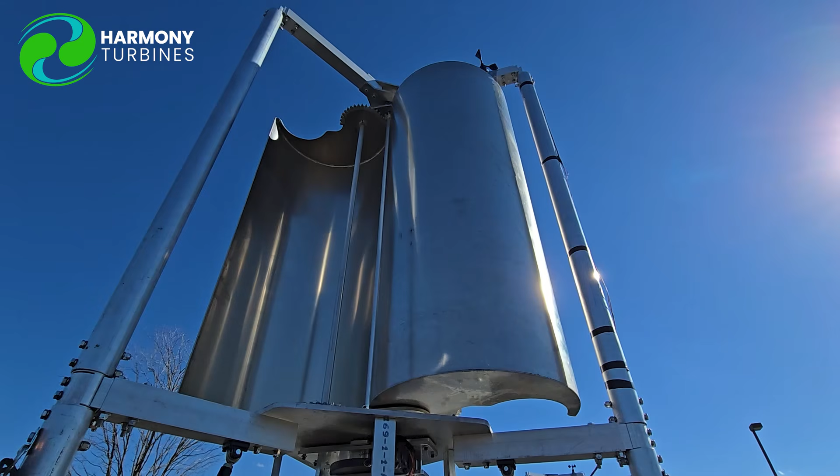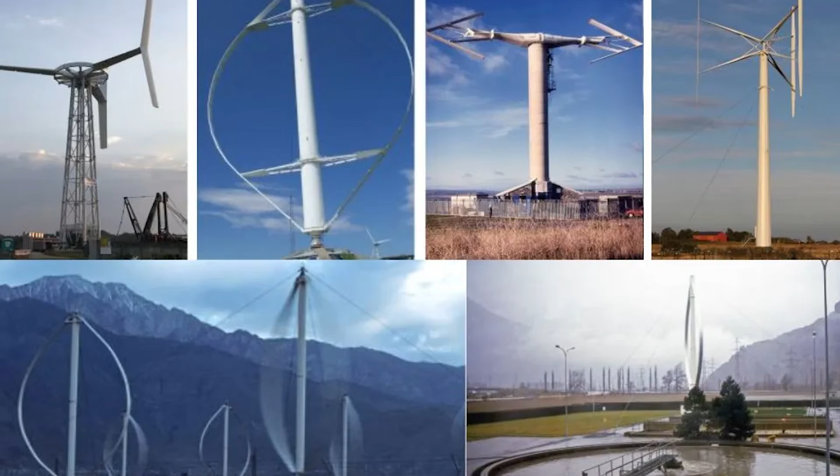So I know that people know what wind turbines are, but yours looks a little different. You mind giving us a little background on the design and what makes it different from your typical fan-looking thing? Wind turbines have been around for thousands of years. In fact, some of the first wind turbines ever created were vertical axis wind turbines. Our turbine is specifically a type called Savonius turbine, and that's a drag type vertical axis wind turbine. So without getting into a lot of the nitty-gritty, take a 55-gallon drum, cut it in half, and then separate the two sides offset from each other, and you have a Savonius design.

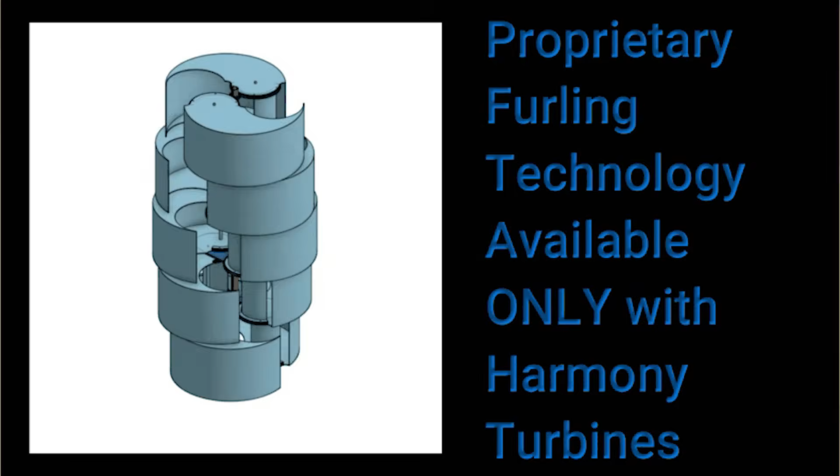Now, we have been playing for years with having a helix twist in ours, but the basic shape of our turbine is a Savonius turbine. And then on top of that, we have a patented technology which allows our turbine to close or furl in on itself to whatever degree it needs to control its RPMs.

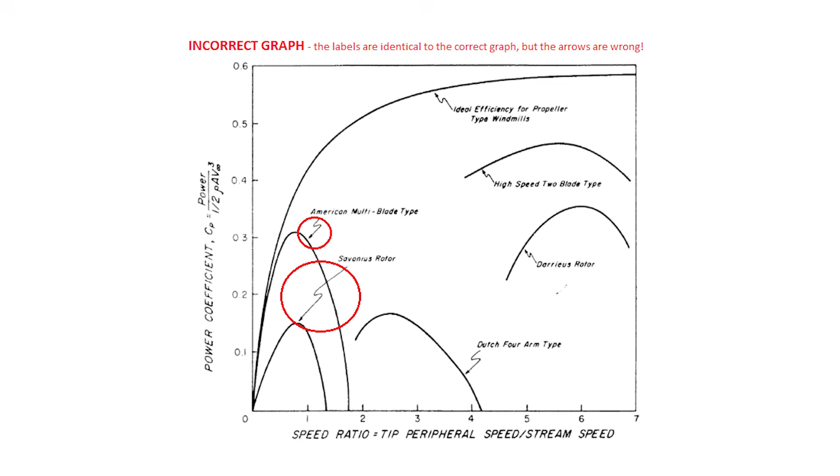Last time we talked, there was some weird quirk of history where many people stayed away from what you're doing because in the textbooks it said it was a dumb idea. It was very inefficient. Can you remind us about that again? Yeah, there was some literature that was published back then; printed books were about the only publication that came out for colleges and universities, high schools to teach them. They had basically listed a number of different turbines, the 3-blade propeller turbine, your Darrieus vertical axis wind turbine, Savonius turbine, the general American farmhouse windmill.

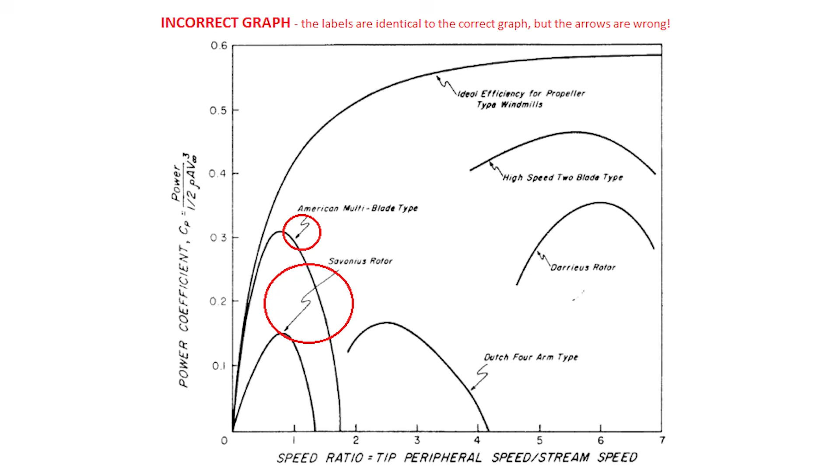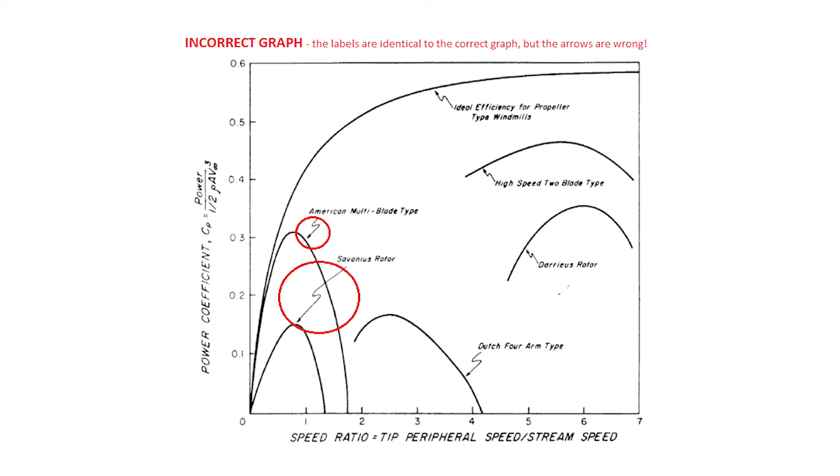And they misdrew the lines. The labels stayed in the same spot on the correct original document. But then this erroneous one came out that had the labels in the exact same spot, but the lines were misdrawn to the wrong thing. So the American windmill and the Savonius turbine got flip-flopped, and the performance of the American windmill was suddenly now being shown as the performance of a Savonius turbine, which was much lower than what Savonius turbines could produce. That then got replicated and published all over the place.

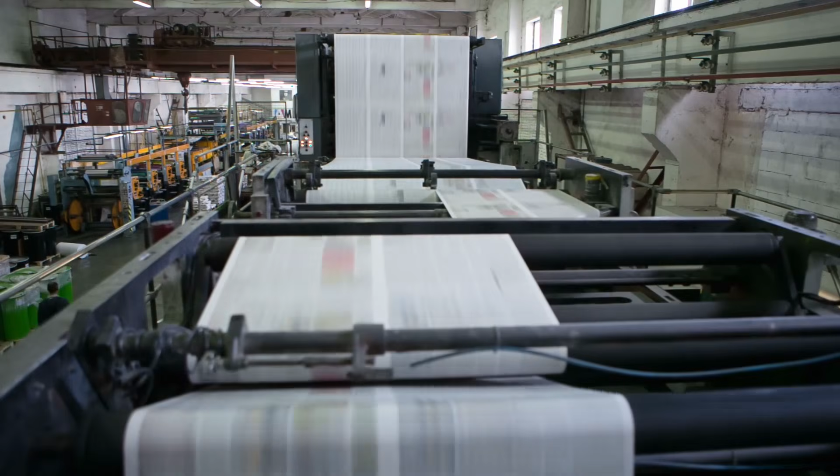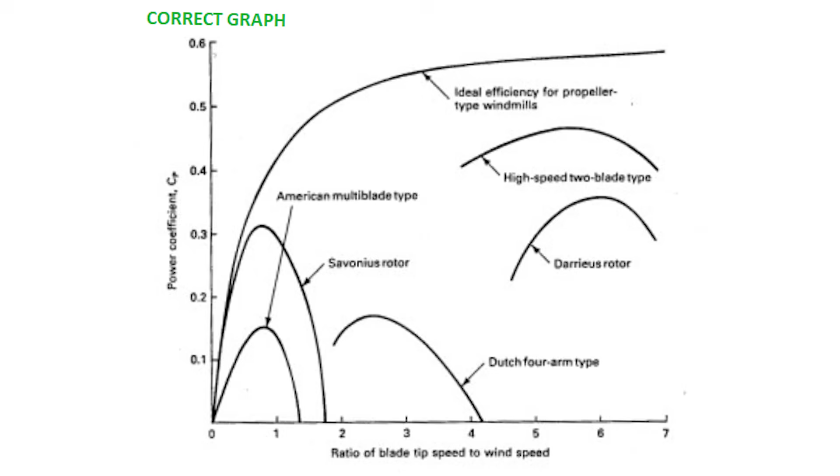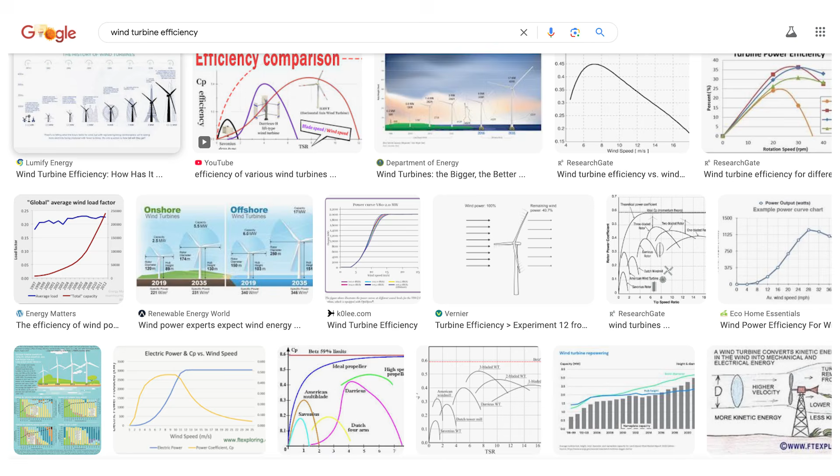And then, of course, when the internet came along, the internet is lazy, and the very first thing people find is what they use. And then that incorrect graphic and chart got proliferated everywhere, really. So you have to really search to find the correct chart that shows the Savonius turbines in the 32 to 34 coefficient of power range. Right. So when you search for wind turbine efficiencies, if you look past the first 10, 15, 20 images that pop up, you'll find the correct one.

Right. So that kept a lot of people, inventors and such, from even looking at what you're doing because they said, well, that would be dumb. Right. Why waste time on something that's only 10% efficient? Well, then how did you figure it out? A lot of just trial and error, playing around with things. The research that I had been doing into clean energy tech goes back 25 years. And it was always one of those things where you don't believe everything you see just because it's in writing. You kind of want to test it when you're a little bit of a mad scientist like I am.

And as I was beginning to test it, things weren't coming out like you were seeing in those charts. And I thought, what's going on here? Maybe there's more to this. So that was really the genesis of me playing around with this scoop geometry with Harmony. The other side of it was, I had been looking at the actual yin and yang symbol, and it had been around for thousands of years.

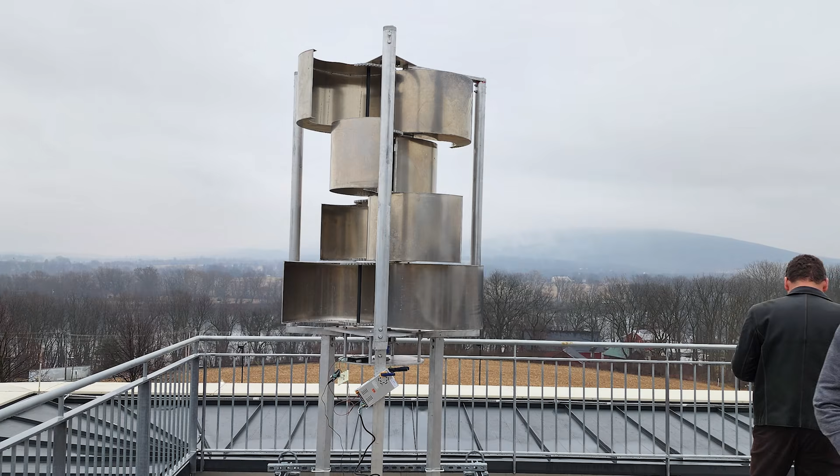And I thought, okay, if this was technology and not just a piece of artwork that some guy with a long beard sat down and drew in the sand, what would it have been? And that was also helping me when I finally had the epiphany that, oh, wow, this could be a wind turbine, and it actually has the ability to close in on itself. That really sparked my interest in taking this further and looking at it as a viable technology. So you guys, your turbine does kind of a weird thing.

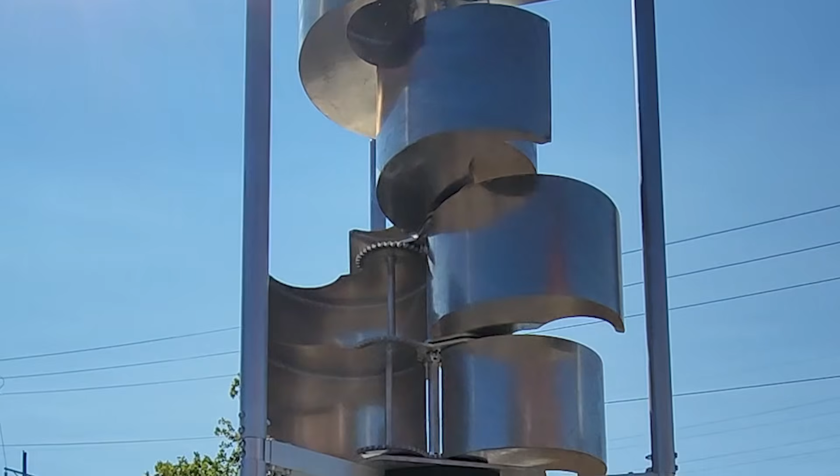It goes from being like a cylinder to being kind of like a broken apart yin-yang symbol. What is that all about, and what's it called? So that technology I patented, I call it furling. When it's fully open, and it looks like an S if you're looking top down on it, that is fully open and capturing as much wind as possible.

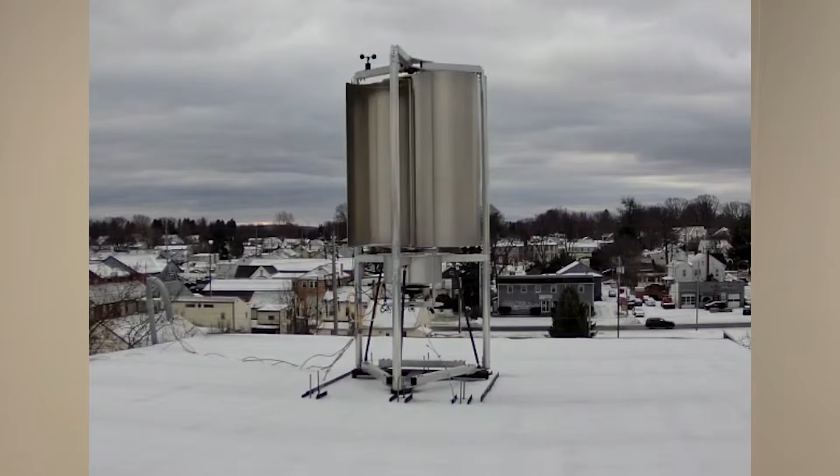But when you're in areas like the coast or Midwest where they have really bad windstorms, you need a way to protect the turbine, because the first windstorm that comes up, your turbine gets destroyed, you're out that whole investment. It doesn't help you to have some great turbine that can't withstand even one good storm. So our turbine will actually pull in on itself and start closing. It doesn't close the whole way. It just closes maybe 10%, 15%, 20% to self-govern its RPM so that it doesn't over rev and self-destruct like all the other residential turbines that are out there.

You and I are sailors, and this reminds me of when we're on the Charles River in Boston and you get a gust and you have to let the sail out or else you're going to capsize, or you're getting no wind that day, so you have to adjust, or you have to lean back on the boat. That's all those things that you do as a sailor to keep the boat moving.

And also, in terms of wind turbines, even the big wind turbines, they have to apply brakes to them. They have to do as much as they can to basically prevent the wind turbine from spinning whenever there's a huge, massive windstorm, because otherwise even the giant ones will break. And there's a couple of famous examples of wind turbines that are on fire and people are like, see, that's why wind doesn't work. And it's like, okay, relax. We have come up with systems to solve it. It's just that they don't allow the wind turbine to keep working when there's a lot of wind, which is a really funny thing to think.

So yours will work in like a hurricane? Well, we don't know yet what the upper end is. But those big turbines, the multi-million, $20 million turbines, they call it feathering. They can articulate their blades to catch an angle that helps them better utilize or better protect themselves in those high wind situations. But they can't pull their blades in and escape the wind. We, without any crazy stuff, have the ability to just escape the wind, so to speak. We are reducing our swept area, which is the height times the width when you look at it. And we're able to pull our width in on our turbine. No other wind turbine out there has that ability.

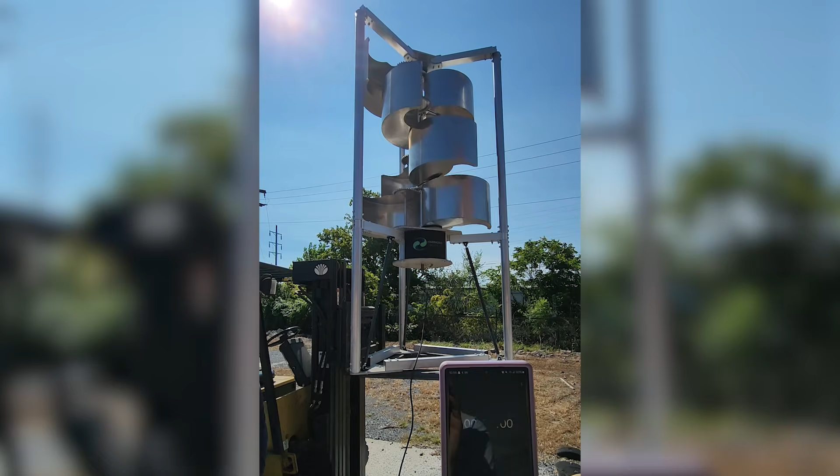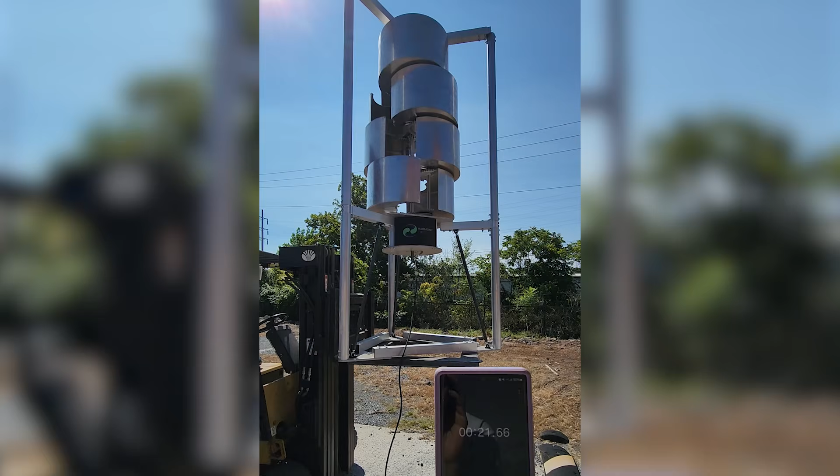So that's what we're trying to do and make it available at a fraction of the price, because we're bringing it down to residential sites. That technology, the feathering, only exists in the multi-million dollar units. You can't find a residential turbine that can feather. The only thing it can do is dump its load, put the brakes on those coils, dead short those coils, and pray that it's enough to stop it. The trick is those wind turbines don't know that they need to do that until it's too late, because they're happily producing, and then all of a sudden they're like, oh crap, it's really getting windy out here.

I better start braking. Well, did you ever see an 18-wheeler going down a hill that they didn't think was as steep as it was? Bad things happen, because no matter how much he pushes that brake, all he does is burn his brake up and pray that there's one of those safety ramps at the bottom that he can go off and crash into the big 55-gallon drums.

That happens in the small scale wind turbines that are out on the yachts and the boats and the catamarans, because they're happily producing power. It's working great. And then the wind starts getting a little bit more. Well, it can't go from spinning happily at its maximum rated power to off without applying the brake. And when the power is too much, it can't do that. It just literally self-destructs. We don't have to apply a brake. We don't have to do anything. We just start furling and coming in 10%, 15%, 20%, and literally will maintain the safe RPM rating that we have for that turbine without any dump load or brake mechanism at all.

So some people think, oh, you just close up to escape the wind, and they think we just close up to a cylinder. But that's not the case. It's not making energy. But there is a point to where you can close up a little bit, let it go.

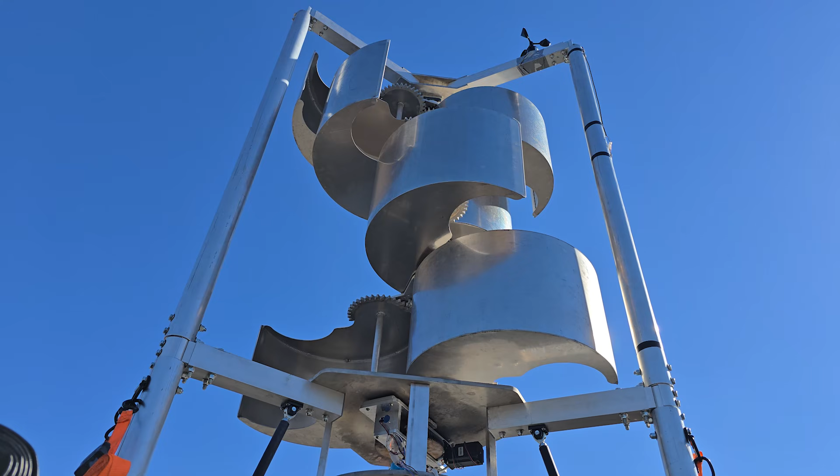Yeah, and you would just close to whatever degree you need. If it's still too fast, it'll just close up a little bit more. And so you're still generating electricity the whole time through the storm or wherever you're at. The only time we would ever have it closed is for maintenance, or maybe the most extreme of storms, like maybe it is a hurricane and you're in the center of the hurricane. Yeah, and you want to shut it down ahead of time.

And Zach, to your point about the sailing, I loved your analogy because it was spot on. What do you call that when you're doing something with the sails? Do you know what they call that? We're letting out the sheet, or we're pulling in the sheet. Is that what you mean? It's called furling. Right? Well, yeah. If it's real bad, then you furl the sails. Yep. That's where we got the term from, sailing.

And we have yacht and catamaran owners calling us on a regular basis saying, Chris, when are you going to be done with this? I've already gone through 3 of these off-the-shelf turbines. They spend $3,000-$4,000 on these things, and then they get destroyed in the first storm that comes up because the thing does exactly what I just described. It's happily working until it's suddenly not. And that's why we're doing what we're doing. We're trying to make the first, finally, smart and intelligent application and product for wind.

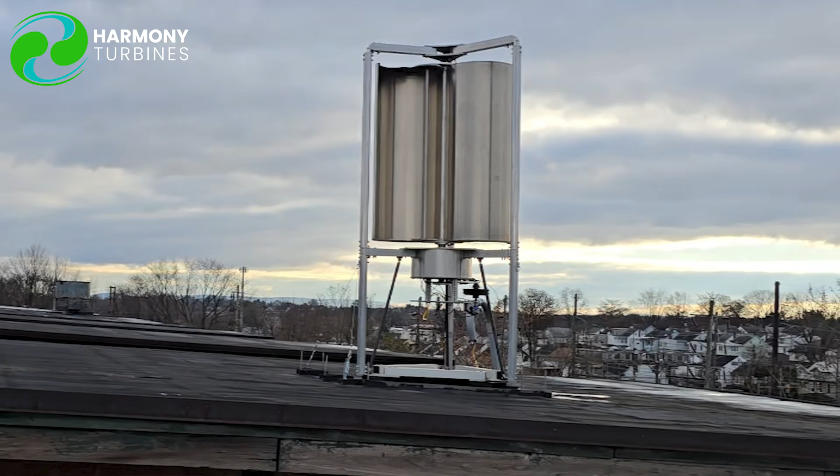Your wind turbine can go from looking like a cylinder to looking like a really cool art piece. And what kind of advantages does it have besides being really cool? Scoop geometry is king. Over the past year, probably 6 months of our focus has been on the wind tunnel. In fact, if you watch our regular channel, many of our videos lately have been about some big advancements, big leaps that we've made in our wind tunnel testing, because it's so much quicker to just 3D print something, go in and test it.

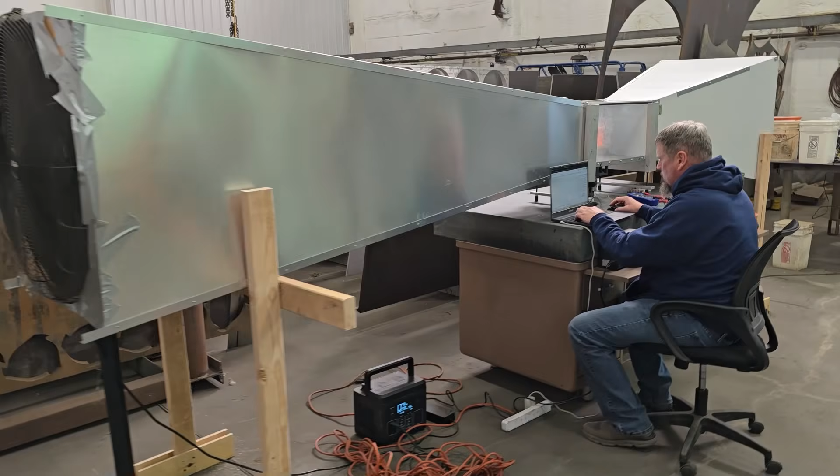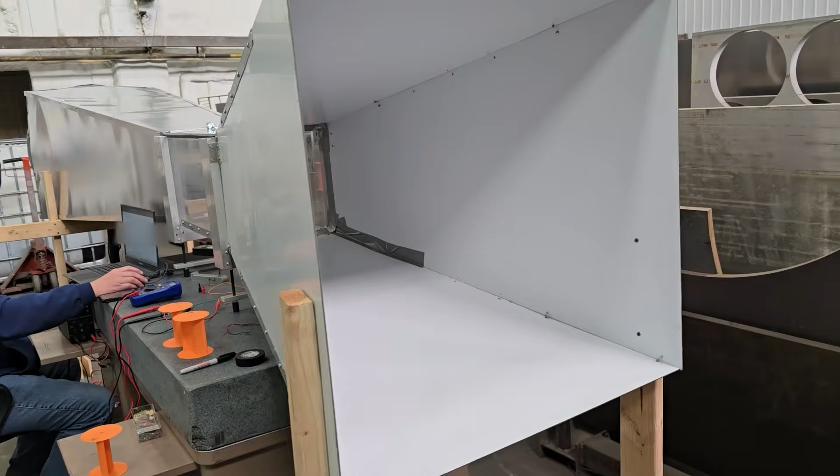We've actually improved our wind tunnel now: instead of pushing air, now we're sucking air. We've added an introductory horn or funnel in the front, and now we've added literally 15,000 drinking straws to give us laminar flow through the wind tunnel. So we've made huge improvements in our wind tunnel performance and the reliability of that data. All this to help us lock in on the better scoop geometry.

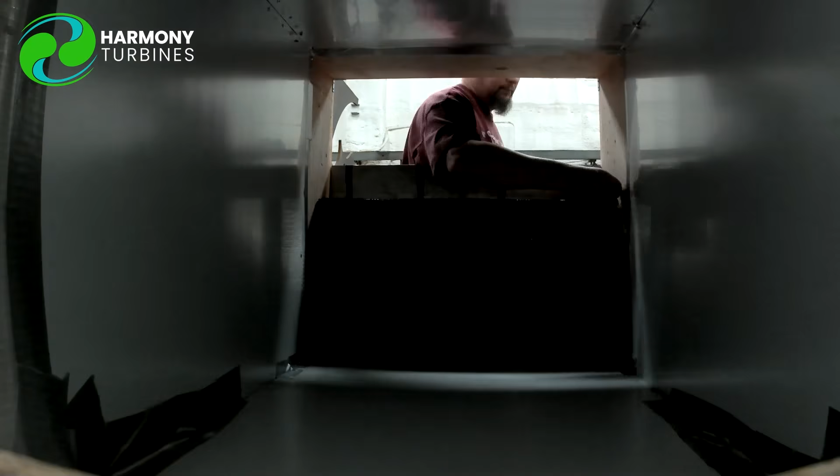So what we're examining and why it's different is because we're trying to optimize scoop geometry that's going to work best with the conditions of wind that you would have out in the urban areas, dirty wind. And we're getting some incredibly exciting results from our wind tunnel testing that we'll then be able to take into full-size models.

That's so funny. I remember that episode of Mythbusters where they took a ton of drinking straws to make their own wind tunnel. And so now you're doing the same thing, only years later, testing a wind turbine. I didn't know Mythbusters did that, but we looked at PVC pipe, we looked at tubing, and after a while, we were like, oh my God, drinking straws. Yep. It's kind of the perfect thing. Wow. Great minds. That's awesome.

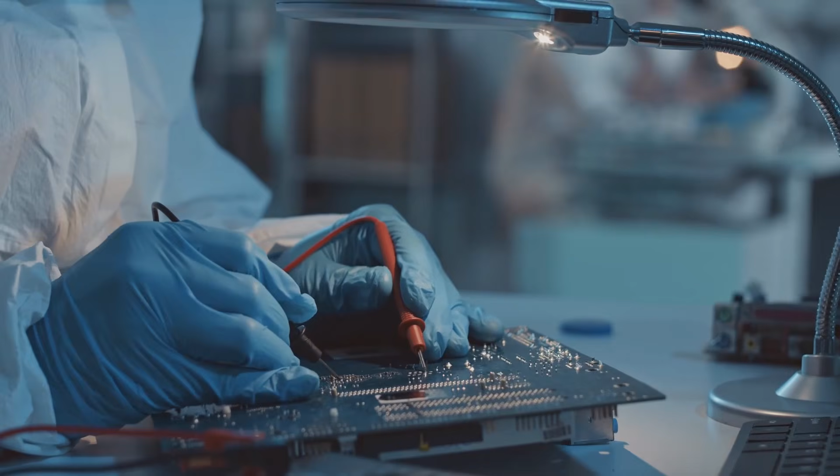All right, so last time we left off a couple of years ago, you were on, I think, version 2 of the wind turbine. Can you tell everyone what you've been doing since? Last time we talked, it was just the two of us working at Harmony. But since then, we have a team of 6 total. We've been hiring people for specific needs; two people can't do it all. We have a machinist who makes our parts, an electronics engineer working on some things we'll talk about later in this video, and some other support people.

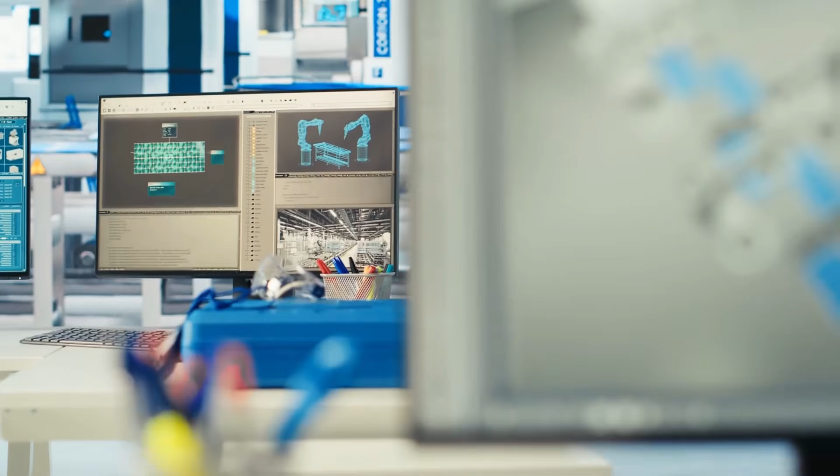So that's really exciting that we've been able to grow our team with meaningful development and meaningful people. Yeah, we were up to 7 for a little bit. We had a design engineer working on nothing but the design and CAD side of things. But he has since left us, and we'll likely hire another person back into that role when we get going with Mark IV.

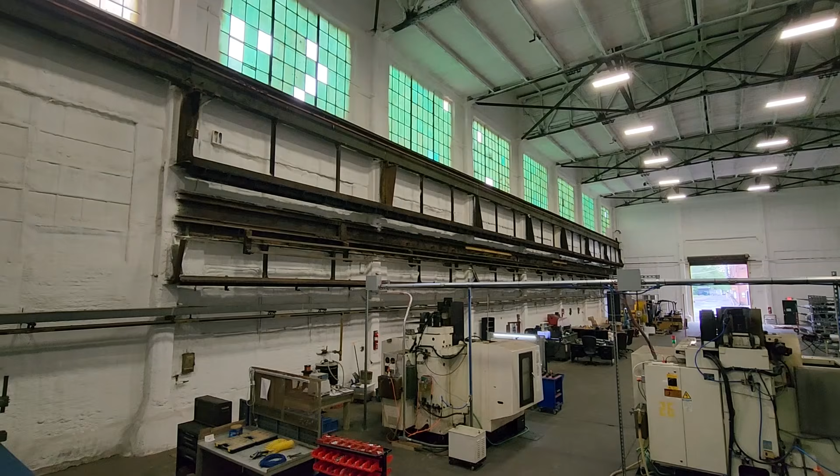But for now, we have other very important testing that's kind of bubbled up to the top that we need to fulfill before we get back to designing Mark IV. And we also changed our location. We were able to get a much larger space here in the same town, down the road from where we used to be. But the space is much better, 9,000 square feet.

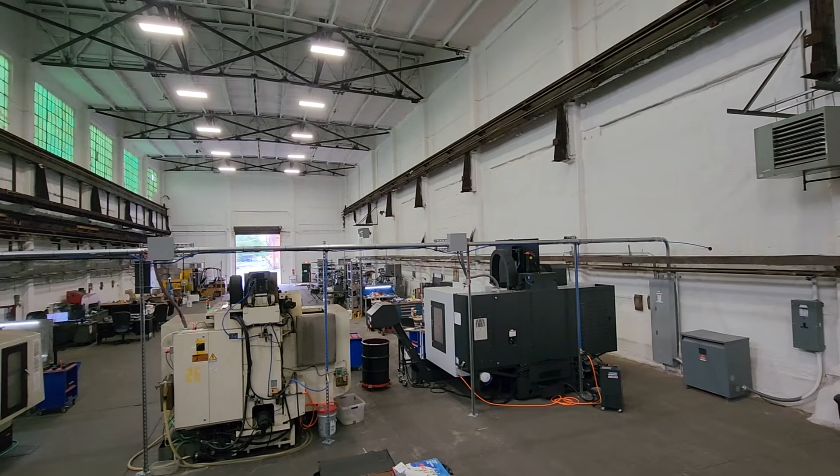Yeah, it triples the size of what we had. It's great because we can have the room for our machining. We have room for stock. We have room to build multiple turbines simultaneously, which we couldn't do back at our old shop. And we've gotten more machines since then. We've gotten two more machines, a milling machine and a 5-axis Okuma lathe. So we have greatly expanded our machining capabilities.

Right. So as our development has progressed, we've kind of morphed the people and the space to match where we're heading and what we anticipate we'll need. Yeah, we could truly go into low volume beta production from this site without even blinking an eye. We might have to hire one, two, or three more people to help put things together and ship them out and package them and all that stuff. But as far as what we need to make a low volume of units continually, we could do it right here. We have the space, we have the manpower, we have the machines.

We have been very busy. We've actually got one of our turbines on a roof full time. We have a camera on it and we can monitor it and see how it's performing. That one up on the roof is Mark III, and we are in development with Mark IV. So from when we talked to you last, the Mark II had many of the mechanical features and the look of what Mark III is,

but Mark III is better. The base, the frame that holds it is better. It goes together easier. We looked at it, okay, man, who designed this? You can't even get to this nut, or you can't get to this bolt. So we moved things around to make assembly way easier, make it more rigid, make it lighter. And then Mark IV has improvements on top of that, making things even easier to assemble, making them more resilient, so to speak. So we just keep making incremental improvements.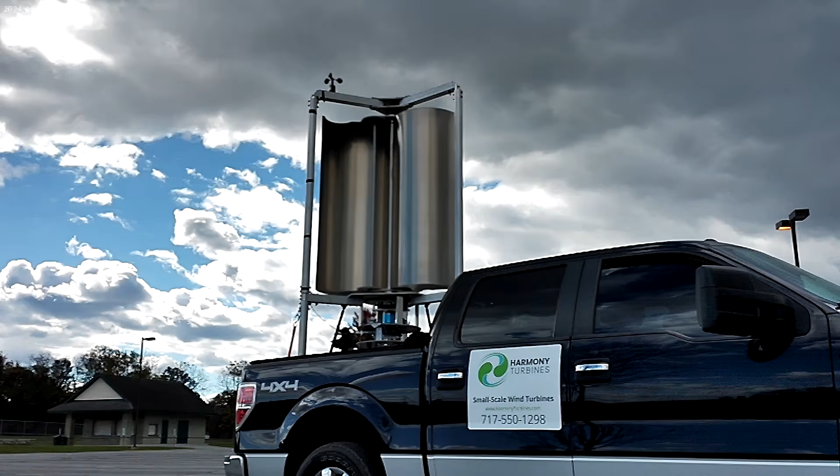So we had one made, and we did truck testing where we took both of them out. We don't get very good wind here in Pennsylvania, so when we get it, we try to take advantage of it. We put them both in pickup trucks and took them out to the park the one day that we had really great wind. And we ourselves right then and there could see the major difference between the two of them.

Visually, you could see that the two-scooper had a lot more torque than the four-scooper or the eight-scooper. And so when we decided to put one up on the roof, we decided to go ahead and put the two-scoop one up there because we know already it performs better. And as we continue looking at wind tunnel testing and other scoop geometries, we want to put more models up there.

We're just picking what makes sense out of the wind tunnel for the next one that goes up there. And if I can expand upon that, really right now we're getting such exciting data in the wind tunnel that we are taking a step back and saying, okay, we've got to be doing something wrong, because the original unit, the one from when you guys interviewed us 2 years ago, the 8 scoop design with the helix twist, on a scale of 1 to 20 in the wind tunnel, that performs a 1.

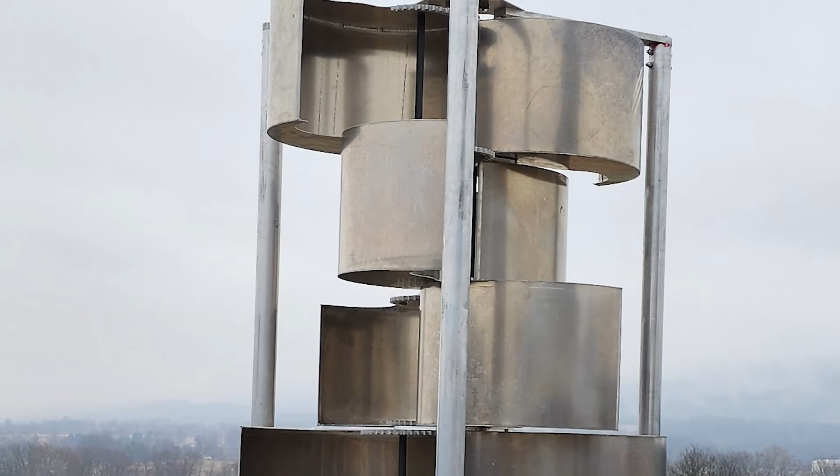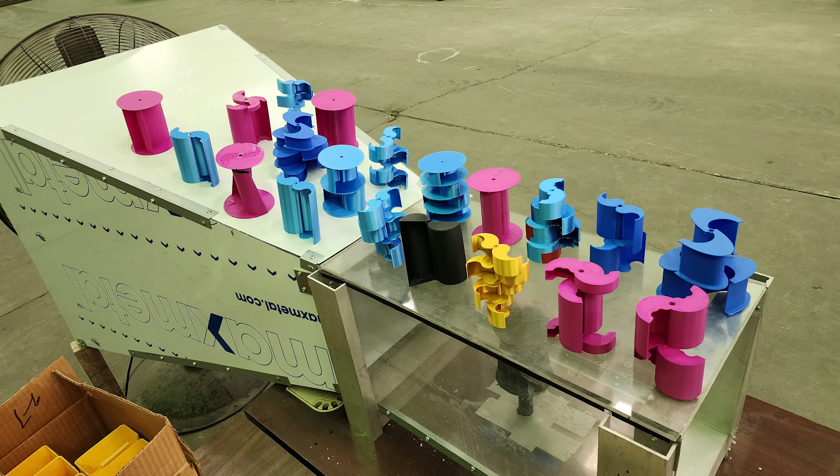The 2 scoop design that we had doubled our performance. Now, when you're a 1, you don't know you're a 1. So all of a sudden we saw a doubling of our performance. We're like, wow, this is amazing. But when we started throwing all the other ones in, the jump was so big, we had to expand our scale. So where we thought we were here with our original one, and then we doubled the performance, we're like, that's amazing. Suddenly, when we get into the wind tunnel and start doing this testing, now we're seeing numbers that are literally 9, 10, 12 times the performance of that original one.

And it's so big that we have to take a pause. That's where we went all crazy and started doing all these upgrades to our wind tunnel, because the performance is so good on these that we are reticent to say, okay, let's just make it and throw it up on the roof. There's a lot to that decision. We want to make sure we're not overlooking something and wasting a whole bunch of time chasing vaporware or something that's going to perform poorly in the full size.

Well, that's really interesting, because last time we were talking, we talked about how there's just tons and tons of wind turbines out there on Amazon that you can buy. And we have experience with this now, dealing with China through e-bikes and e-scooters, that the way it really works is you hear about some factory where a friend of yours is making an e-bike, and you're like, great, make me an e-bike, make it a different color and name it something different, and we'll ship it out. They don't go back to first principles and say how to make a better e-bike. You guys are taking the time, it seems like, to go back to first principles and say, wait a minute, how's the science actually working here?

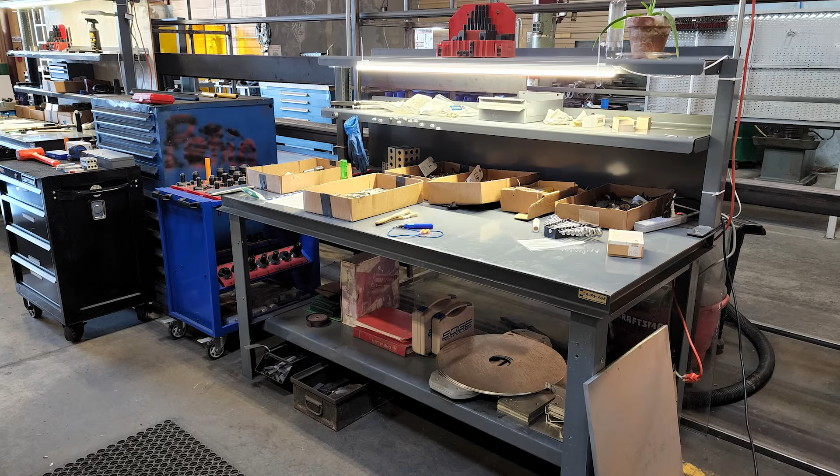We are absolutely doing that. And in some respects, people will get frustrated because they're so used to going, boop, and it's here in 2 days. And they're like, my God, you've been at this for years. What's going on? Well, real R&D is not a fast process. It takes time, it takes dedication, it takes perseverance to even notice these nuances and then chase them down. And then to say, okay, these don't matter, so we're going to focus on the other ones over here.

We are like a surgeon here, taking away the fat, cutting away all the stuff that doesn't matter, and trying to focus on the main pieces that are going to give you, the end user, a better result in the end. And it's phenomenal what we're finding. It's scary how much of a difference we're seeing.

So I think people watching might be focusing on the fact that you've got these different blades, but you're also working on a different generator. I don't know what it's called again. I think last time it was axial flux. Axial flux. I always want to add the word capacitor after it because of Back to the Future. Yeah, flux capacitor. Can you explain what that is? Because you have a patent on it.

In our patent portfolio, we have an axial flux generator that's patented with a variable air gap. And nobody has done this before. There have never been any patents published for this purpose. Axial flux generators have a magnetic platter above and below the coils. So if you take the whole generator, flip it and look at it on its face, it would look like a clock. And each of the 12 digits around the clock could represent a coil.

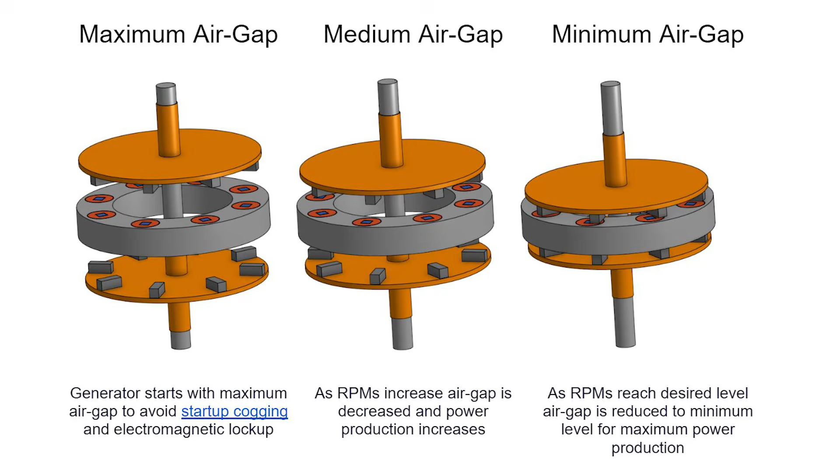Now flip it back to looking like a hamburger. The two buns move while the burger itself stays still. So the burger itself is where the coils are, and the buns can start far away from those coils. And then as it gets going, they can come down into proximity, making full power. All of the axial flux generators out there in the world right now are just a fixed position. They're a 1 millimeter air gap and that's it. But with our patent, we have the ability to actually move those platters.

So it's like a clutch. Yes, very much so. Interesting. It allows you to begin with very little resistance because wind is unique. You start with no torque in wind. All the other applications where you're using a generator have tons and tons of power and torque behind them. They don't care about startup resistance, but wind does. And so that's why I have our own patented generator on the side here.

So it's like the wind is starting in first gear, right? And you can't just dump the clutch, because then you stall and nothing happens. And you need the momentum in the wind turbine for it to work. Yes, that's exactly right. That patent and that technology is kind of being put on the back burner, so to speak, so that we can get the turbine out to the public.

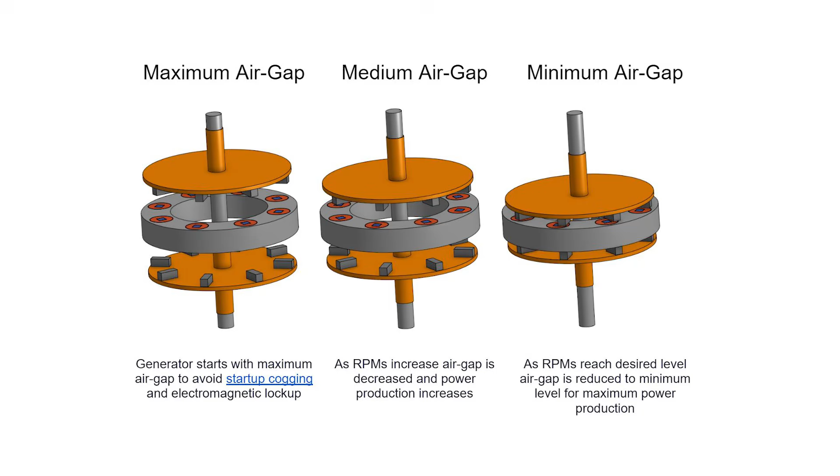We had been, for a long time, probably 2 years ago when we talked to you, saying, okay, we're going to pursue doing our own generator. But then about a year ago, we realized that's potentially another 2 or 3 years of development in and of itself. And we didn't want to delay the release of Harmony just because we're trying to do our own fancy generator. So we said, we're going to put that on the shelf and focus on the turbine. We'll just use an off-the-shelf generator.

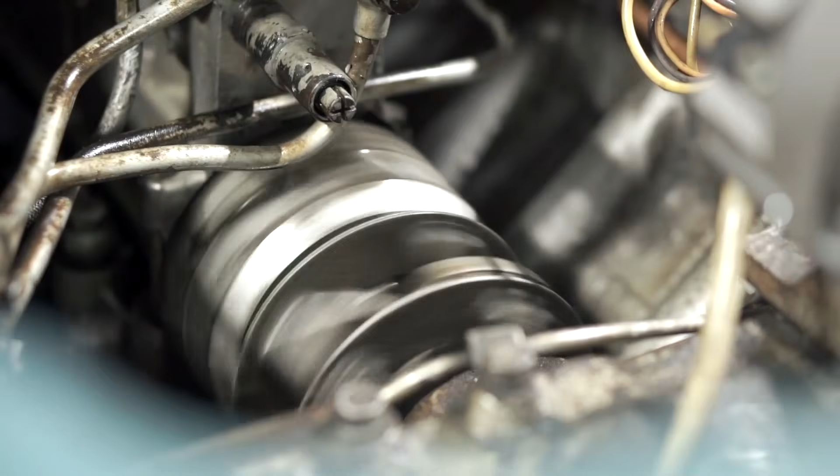But that has led us down a very ugly path, because none of the off-the-shelf generators meet our needs. They're all made for 3,000 RPM, 6,000 RPM, very, very high RPM. And now we're right back to the problem of, in essence, dumping the clutch, or in this case, jumping on a 10-speed bike in 10th gear and trying to go. So we've tested probably 10 or 12, at least 12 generators, I think. We're looking at gear ratios and different things, and it's not good. Yeah, it's a mess.

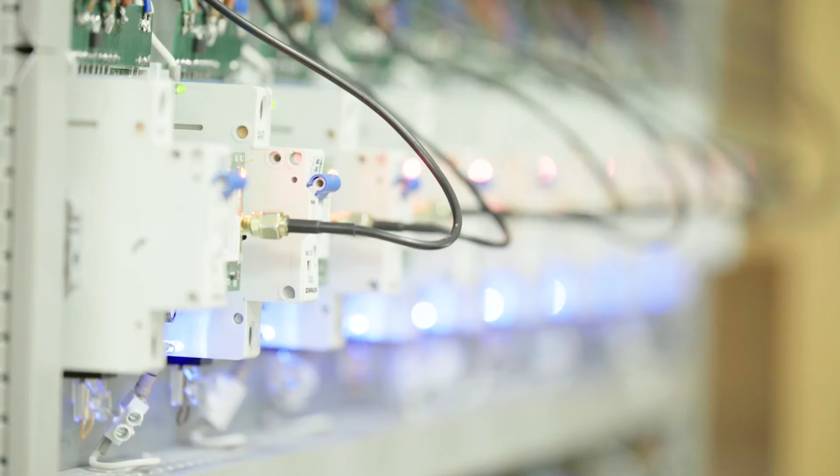So can't you solve this problem electrically? If you have a non-variable air gap generator, and let's say you disconnect all the coils, doesn't the thing spin freely? And so can't you increase the amount of power that you're taking electronically as opposed to physically? You could. It just gets very complicated when you start to throw in relays and circuitry that does that. That additive capability isn't a very simple thing to pull off.

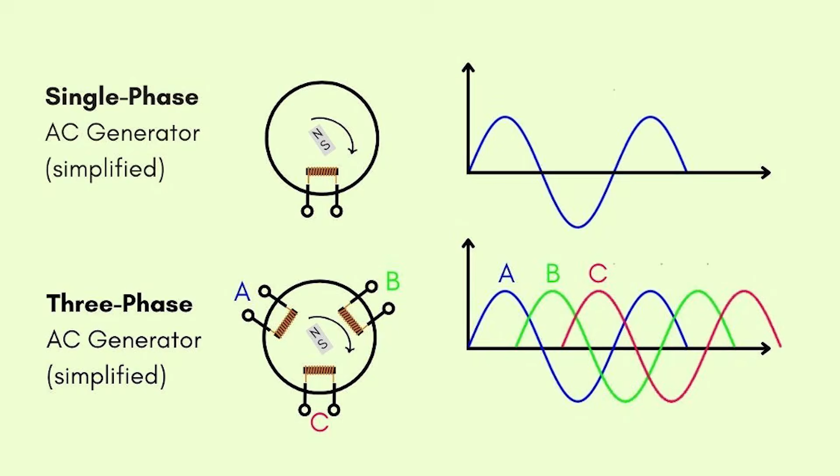A lot of generators are wired up as a 3-phase generator, and you only have 3 wires coming out of the thing. So I can't just disconnect one of those wires. I only have 3. I have to use 2 of them to make anything happen. And when you even throw 2 of them on, now it's something like 40% braking force. And then when you add the third one, you have your 100%.

And the other problem is, because the wind turbine is going to start off spinning pretty slowly, and you're talking about generators that are going to spin at, what, 3,000 RPM? Yeah. Then you have to gear ratio it up. So that's what you mean by the 20 speed on a bike. Exactly. That's the kind of gear ratio we're talking about. So it's not even like first gear. It's more like dumping the clutch in 6th gear.

20th or 30th gear, literally like a 30-to-1, because the top RPM of our turbine is going to be somewhere around 140 RPM naturally. And if we're trying to get up even to 3,000, I'd have to do the math on that, but that's like a 20-to-1 ratio that you would need.

In layman's terms, is this why these off-the-shelf wind turbines only work when you own a sailboat? It seems like for most of us, if you're below the tree line and not at the coast, a lot of these turbines just don't work except for like 2 days a year. Yes. They need a tremendous amount of wind to just get up to what they call the cut-in for that turbine. You need a lot of RPMs, a lot of wind speed, to get it to the cut-in. And that's because many wind turbines are designed to work at high speed.

And I mean, it's fun to talk about. It's like, oh, this wind turbine, once you get it going, it's going to be going great. And that's awesome. But most people, or at least I erroneously thought at the beginning of this, I would look outside and see some leaves blowing around and think, oh, if there's wind out there, I could harness it and charge up my electric car.

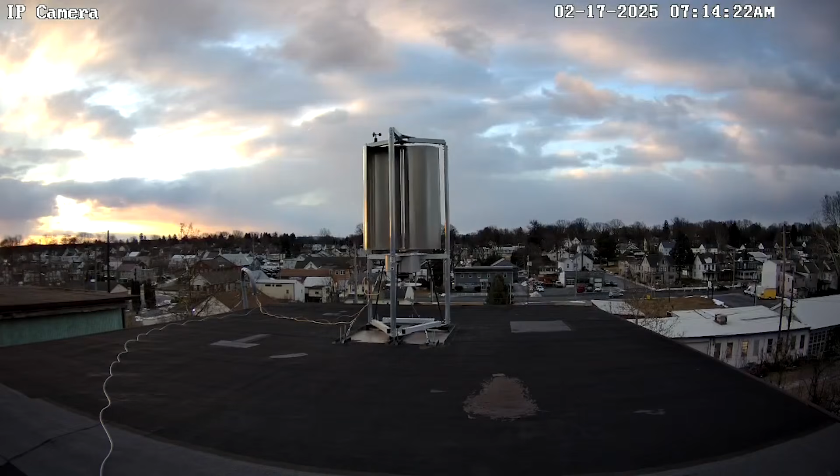Talk to me a little bit about what the product is going to be, because if people have been off and on following you guys for a while, they've seen a couple of different wind turbine styles. They've seen a bunch of different sizes. What are you planning on selling? We want to launch with something that makes sense for the average person. It's not going to be massive, so our hope is to be in the 400, 500 watt range with this first turbine. Keep it small enough that we can handle manufacturing dozens or hundreds of them in our shop without a huge new warehouse and special equipment.

That would also make it so that you on your end can take it and set it up easily, or have a contractor set it up, and they don't need cranes and high lifts and all sorts of things. So we want to keep it simple for our first flagship product. The unit would be probably about 5 feet tall by 4 feet wide. It'll be the same size that you saw in the videos we did with you back then. Remember, I was saying Mark II and Mark III. From 20 feet away, it would look almost identical.

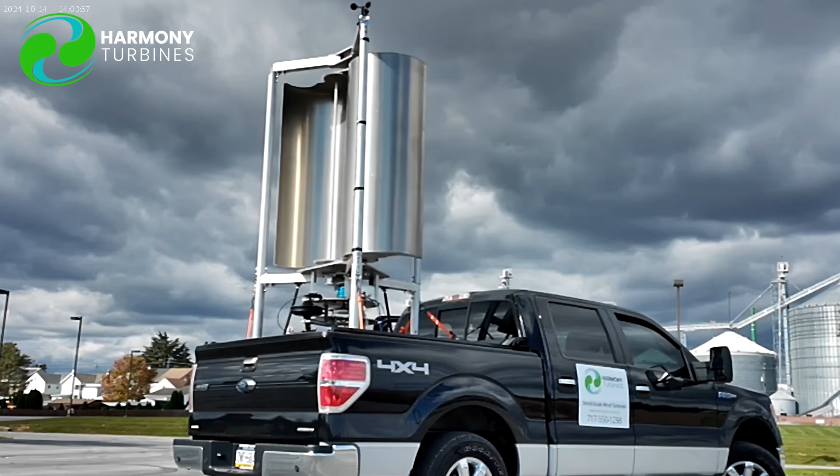All the changes that we made are going to be under the covers, so to speak, with scoop geometries, the assembly and fabrication, the number of fasteners, and how it all goes together. That's what we have changed and improved. So it will look very much like that unit, but probably only a 2-scoop design. It'll still have the furling capability, but it'll more than likely be just 2 scoops rather than 8.

Last time we talked, you were on the cusp of switching from plastics back to aluminum and stainless steel, I believe, or steel. Where are you at now? Are you thinking you're going to go back to plastic? Are you going to stick with metal?

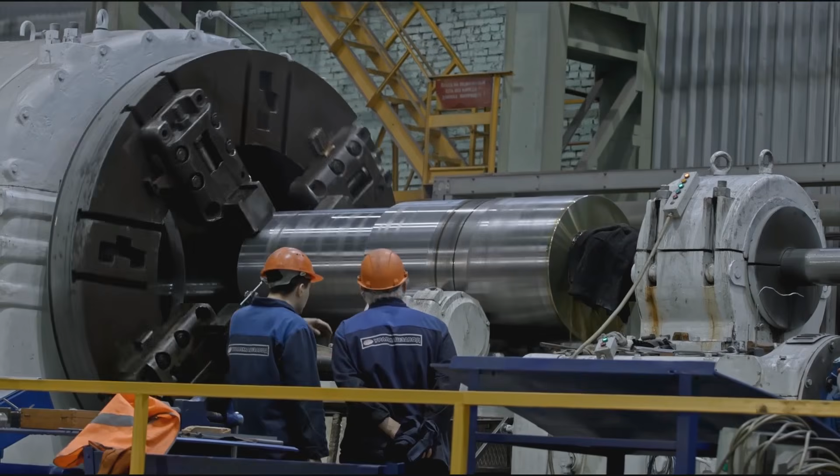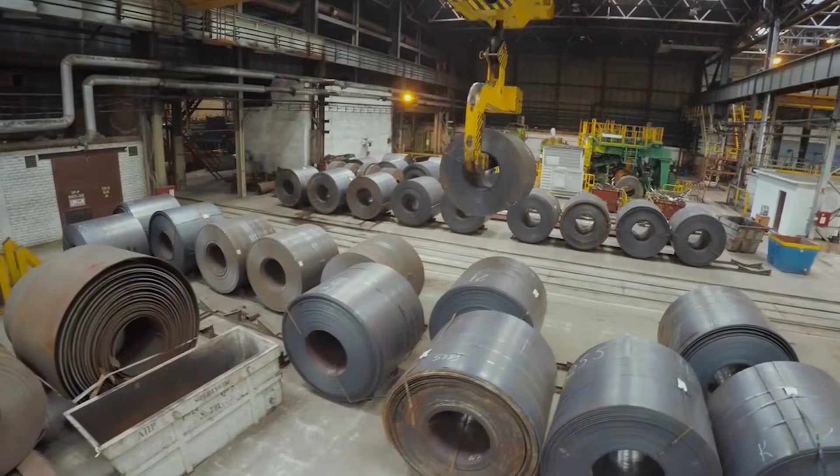For beta, when we release it out to our first customers, it will likely be aluminum at that point. That's what we're manufacturing now. That's what we can work with. It's easy to get. We can do anything we need to with it. So in early production, beta, that would be more than likely what they'll get.

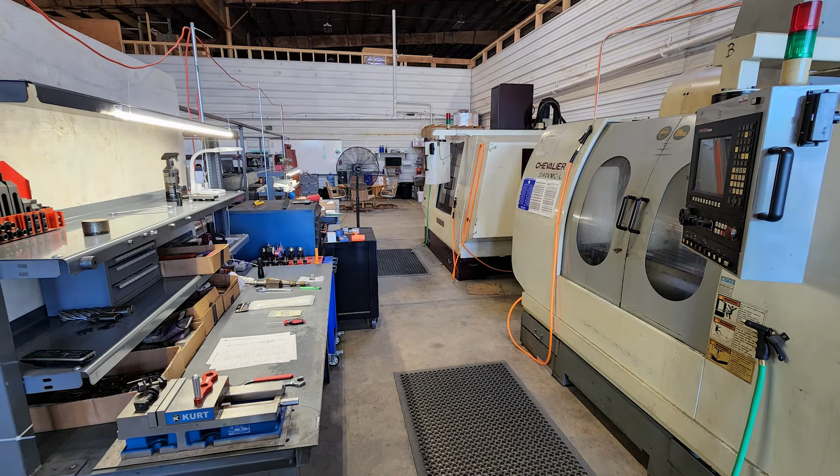We are looking at and have been speaking with several companies that want to do all kinds of things with us, carbon composites, new polymers that are not requiring to be baked or heated. They can just cure at room temperature in 24 hours, things like that. So we'll look at those options, but that's more like after we're out of the beta stage and we're saying, okay, how can we make hundreds of these in a week? Then we need to start looking at technologies beyond just machining aluminum and doing things like that.

And we'll also be looking at different weather environments, because on the coast, you can't necessarily have an aluminum turbine out there. So we have different applications we want to be able to... Yeah, probably offering different models.

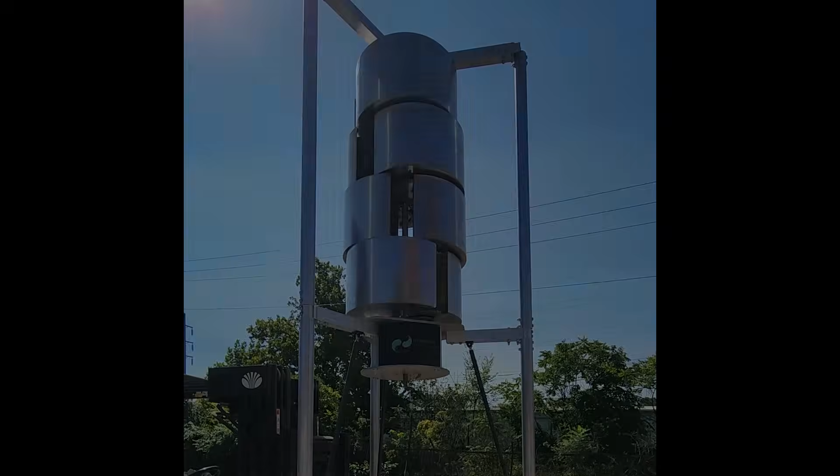So a minute ago, we talked about having a patent on the variable air gap generator. Do you have any other patents protecting your work? We have the patent that's protecting the furling technology as well. And we are, in fact, working on potentially a third patent now, dealing with the generator in a different way, solving some of the issues that we're seeing. So we have 3 prongs of research that we're really focusing on the past 6 months. One is the wind tunnel testing and trying to find an optimized scoop geometry for our beta units.

The second is we're actually back to making our own generator, because 6 to 8 months of searching and banging our heads against the wall trying to find an off-the-shelf generator is not working out. But we're simplifying our generator. We're not going to do the initial rollout with the variable air gap and all that. That's overkill. We don't need that on the small scale units like we have.

But what it has done is yielded another opportunity for potentially a third patent here on the technology. And I won't disclose what that is yet, but it's some really, really exciting stuff that, if this works, our generator could be the solution that all the vertical axis wind turbines out there have been looking for. That would be the hope, at least.

And then the third prong is our charge controller, because all the charge controllers out there kind of suck for what we need. They too are made for massive amounts of wind and this expected range, but anything outside of that range, just like your guy on the reviews, I got nothing. So basically, we have an employee full-time here and a contractor working on redesigning our own charge controller. We've got our own work that we're doing on a much more simplified generator, and then the scoop geometries and that research that we're doing in our wind tunnel.

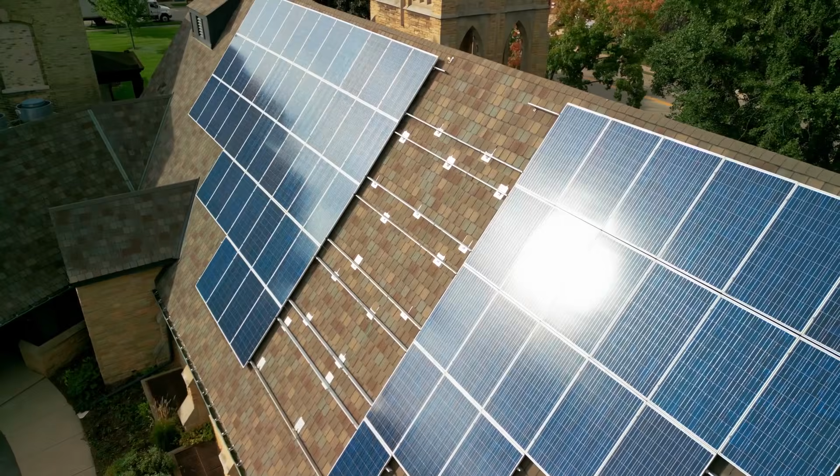It's so interesting you talking about all this stuff that doesn't look like a wind turbine. It reminds me of a lot of the stuff that Zach and I have been working on with solar. One of our first solar projects, we took probably about 5 or 6 solar panels, hooked them all up to an inverter, which should handle that range of solar energy at full sun. The problem was it wouldn't handle it when the sun started to go down, and not like 9 o'clock at night, but like 3 o'clock in the afternoon.

Yep. And so the voltage would drop below, I think it was like 103 volts. And then the inverter would go, oh, I'm done for the day. And you'd go, wait, no, there's still the sun. Yeah. And it was interesting. We were better off with a smaller inverter that would basically max out its output in the middle of the day, but still give us those curves in the morning and the evening.

And this is solar energy, so it's way different than wind, but it's sort of similar in the sense that you can think of if you lived on a planet where instead of the sun coming up and getting brighter every day, the wind would just slowly pick up and get faster and faster and faster and then go down and down and down. It's very similar to that. And the electronics were our biggest hiccup.

And so it's funny to hear you kind of complaining about the same thing with wind, where you're just throwing away power because you were optimized for some perfect ideal, which does exist. If you go up high enough, wind becomes just a constant force that you can harness. And that's why so many wind turbines are so big. But most people can't take advantage of that on their property.

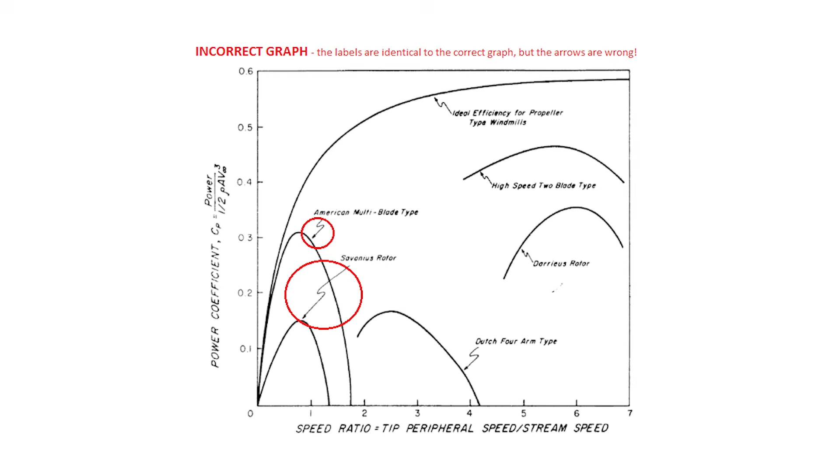Yeah, and you don't get to actually fall back on science that's taken place before you because it's largely been ignored, it sounds like. I mean, I kind of just want to go back to that chart that we're showing here. I understand mistakes. I'm sure that's possible, but this doesn't seem like a mistake to me. It seems like somebody somewhere was like, don't let them know about it. It was probably the guy who was like, I read the American Farm Fan, and here, you should change the textbook to show that my fan's better.

I mean, I always liked how they looked. They look very quaint, but they don't look efficient. You're talking about the traditional looking. Yeah. I mean, it looks like some guy who was like, well, if wind is blowing, I better catch all of it, I won't miss any. It's like, okay, you didn't do any science. You thought like, oh, this will work.

Well, like you just said, you're in Pennsylvania, we're here in Massachusetts. There's whole chunks of the country where we just don't get the right wind to make the traditional ones work. So it's kind of great that you saw that in your own life, that you actually have to put it on a truck. When we were testing one of our first generators, we had the exact same problem. We couldn't get it to work. So we threw it on our Tesla and just drove down the street. I think people thought we were insane, but that's the only way we could get the wind. Yeah. You have to make your own.

I joke around and tell people it's like we're developing a Lamborghini race car on a little 1 mile diameter island. We can't even let the thing run properly. That's how it is here developing this wind turbine in Pennsylvania. We're trying to develop this amazing wind turbine, but then we have to wait 2 months sometimes to get good wind. So we hear you, and we are working on all of these issues because there needs to be a solution to this. The wind is available to us all. Why not have something that can at least harness it as well as possible?